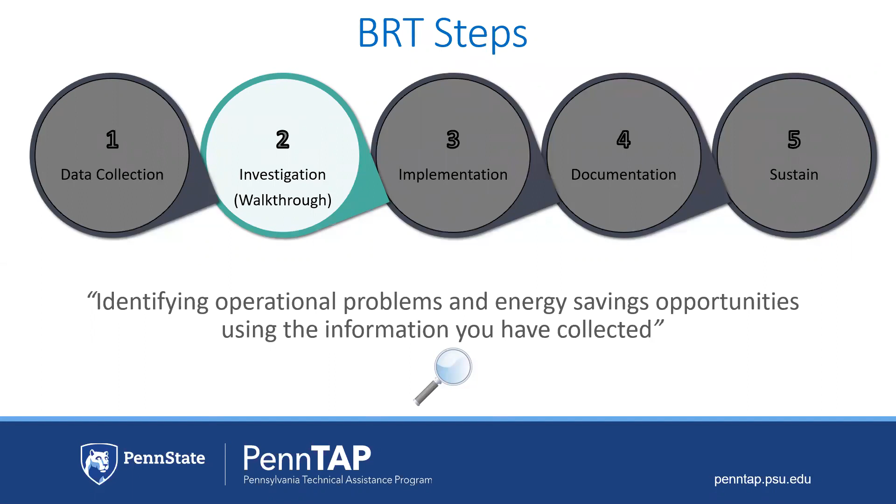Investigation or walkthrough is the second step. After you have the data collected, it's time to investigate. Look at all the building's conditions and operations. You want to investigate both during the heating season and the cooling season to see if everything is operating properly. You want to log all information and observations during the walkthrough. This will help you capture opportunities and ultimately calculate potential energy wastes and savings.

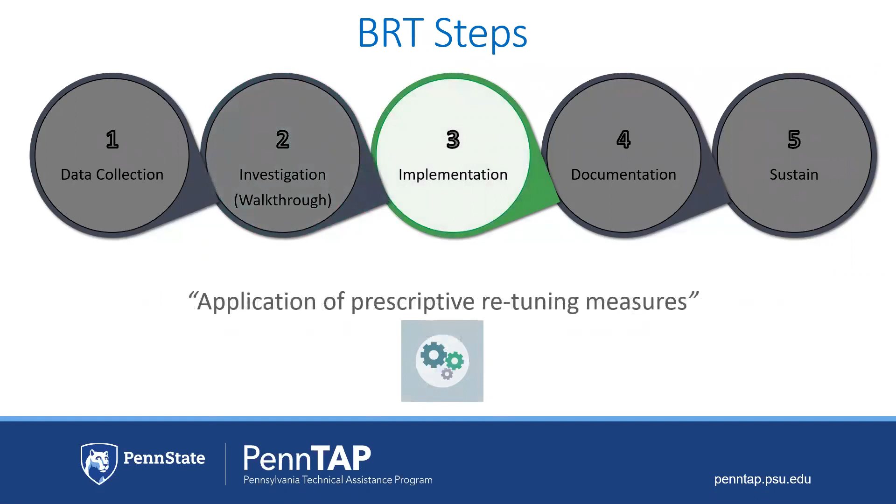The implementation step, this is self-defining. This is the application of your prescriptive retuning measures. Documentation, step 4. This is the reporting of your retuning findings and your impacts. Maybe you found some opportunities throughout your facility. Maybe it's for LED lighting, or you saw that you should insulate some of your hot water piping. You know what you need to do for implementation to fix the identified problems. Now you need to document and calculate what the savings would be. This will help you rank your projects so you can select which ones to pursue going forward.

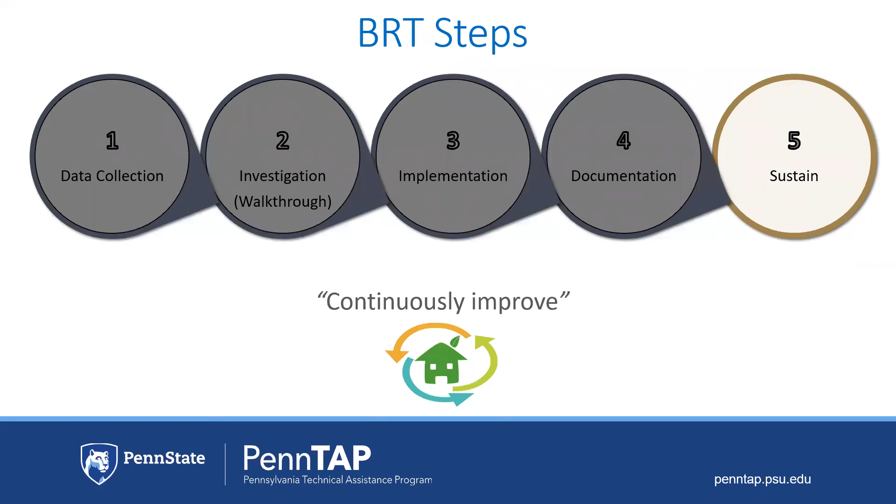After you have initiated the first steps of BRT and you have implemented some projects, your future goals will include continuous improvement and sustainability measures. We will discuss benchmarking and energy policies during the workshop. But reflecting back on the principles of BRT mentioned earlier, the sustain step is necessary to keep up with the positive impacts you've initiated so that you do not lose your momentum.

While completing your investigation, which is step 2 of BRT, we recommend you take a few low-cost tools with you to help uncover any issues. The Kill A Watt is an electricity usage monitor. Connect appliances to the Kill A Watt and it will assess how efficient they are. The LCD display will count the consumption by kilowatt hour. From there, you can calculate your electrical expenses associated with that tool or equipment by day, week, month, or the entire year. You can check the quality of the power by monitoring the voltage, line frequency, and power factor.

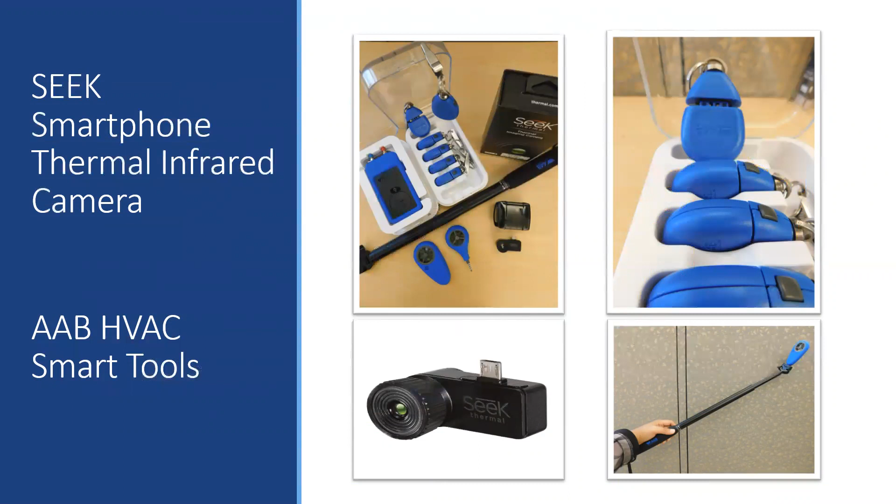A light meter is used to measure the number of foot candles in a designated area. This is helpful to understand if the area is overlit, underlit, or if daylighting is effective. Distance meters, or a measuring tape, can be useful to confirm the square footage of a space, and you can use that information to size equipment, such as if you are considering ductless HVAC systems, among other projects. Many smart tools are available nowadays and are useful in building retuning to measure temperature, humidity, airflow, and air pressure.

Find problems like air leaks, missing insulation, or even electrical overloads in power lines with the Seek Thermal Infrared Camera. This is a tiny, compact, portable camera, and this equipment can be used with either Android or iPhone smart devices.

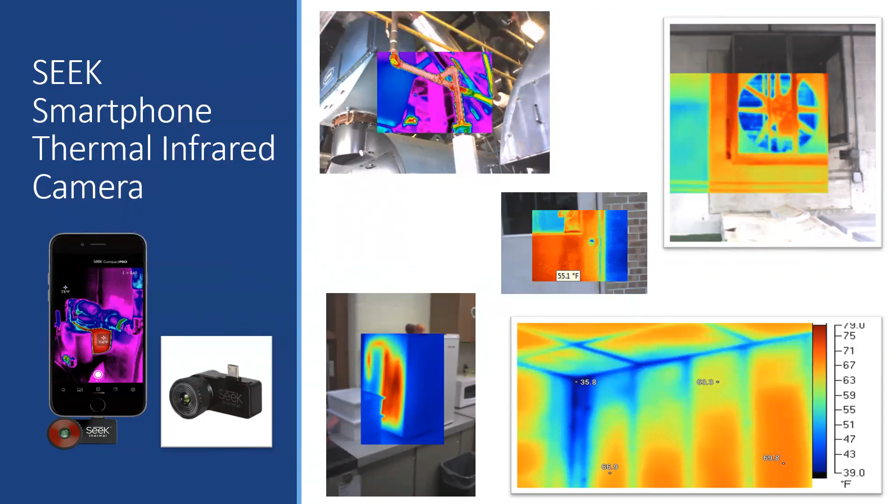Granted, in this case, you would need to investigate more to determine the root cause, but at least you have discovered a problem and now you can move forward to correct it. There are a lot of high-cost infrared cameras out there, such as these, which cost thousands of dollars. But the basic model of the Seek thermal camera only costs $250, making it a low-cost tool.

You can use these tools to help you identify if a room is actually too hot or too cold. Do you think you might have a leak in a damp area or spot? Maybe it's an old issue and it no longer applies. You can confirm with these tools if you have an active problem or a passive problem. These tools are no bigger than an egg. They are discreet and they are very simple to use.

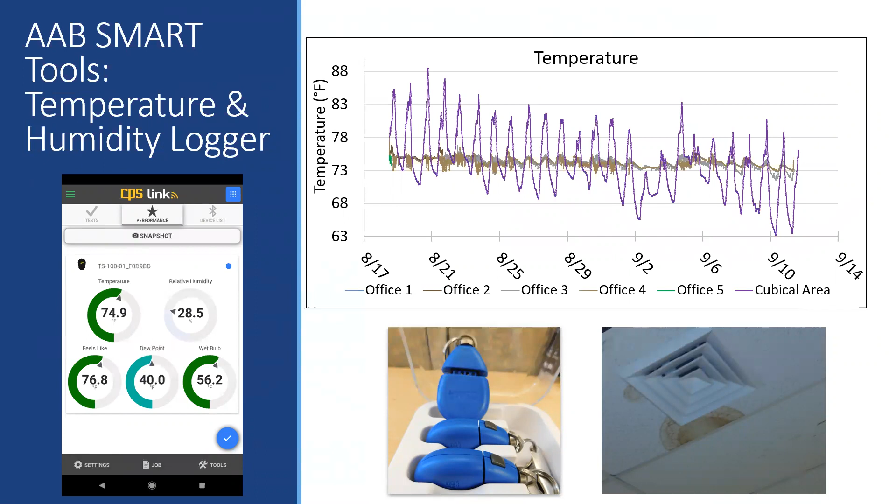There are a variety of AAB Smart HVAC tools that support building investigation. Another tool is the airflow meter. Here you can measure the airflow of your overhead vents, air blowing under an external door that might have broken weather stripping, or from wall units in the classrooms or in hallways. When was the last time your wall units were cleaned of debris? This tool can help you figure out if your equipment is showing signs of degrading.

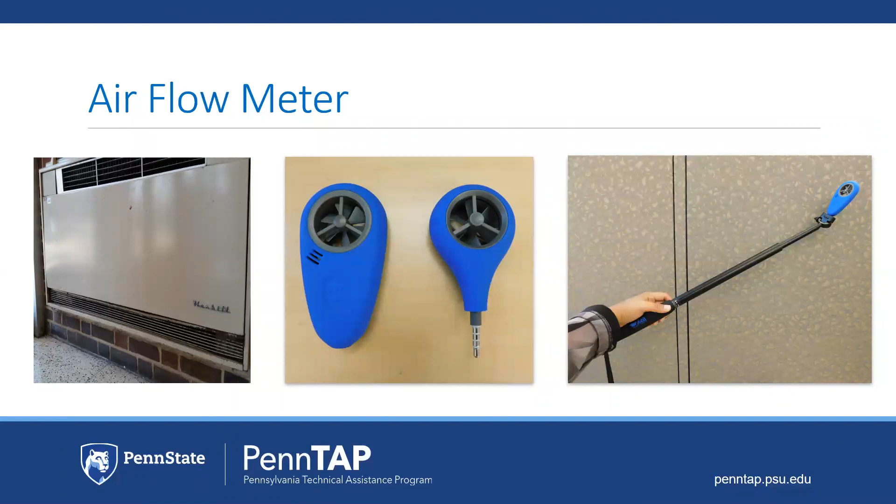Please note that we will have these tools and others at the workshop for review. To take advantage of the smart tools, you will need to download these apps to your smart device. Seek Thermal is the app for the infrared camera, and CPS Link is the app for the AAB HVAC smart tools. These apps can be found on the product's websites and are free to download. I recommend downloading the apps prior to the workshop so that you can take advantage of these tools at a closer look.

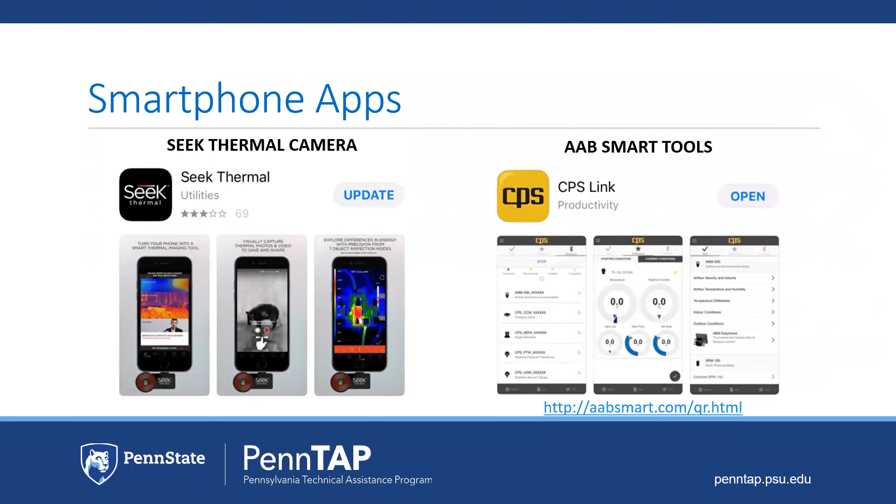Energy savings. The concept is easy to discuss, but can be tricky to calculate. Up next, I'm going to walk through a few examples on how to calculate energy and cost savings.

Lighting. A school building has a standard fluorescent lighting system comprised of 34-watt T8 lights with a standard ballast in a 4-lamp troffer. It is proposed to install 4 18-watt T8 LEDs in the existing fixture with no ballast.

Estimate the energy savings in dollars and the simple payback if the system operates for 4,000 hours per year and has 100 fixtures. The demand charge used in the calculations will be $10 per kilowatt, and the energy charge is 5 cents per kilowatt hour. Also, an installed LED fixture is $50. There's a lot of information in this scenario, but we're going to break it down with what facts we have, and we will go through the calculation over the next few slides.

We are looking to determine the energy savings in dollars and the simple payback, which is the time it takes for you to pay off your investment so you can start using those savings for a new project. So to move forward with this problem, we will need to determine the energy and demand savings.

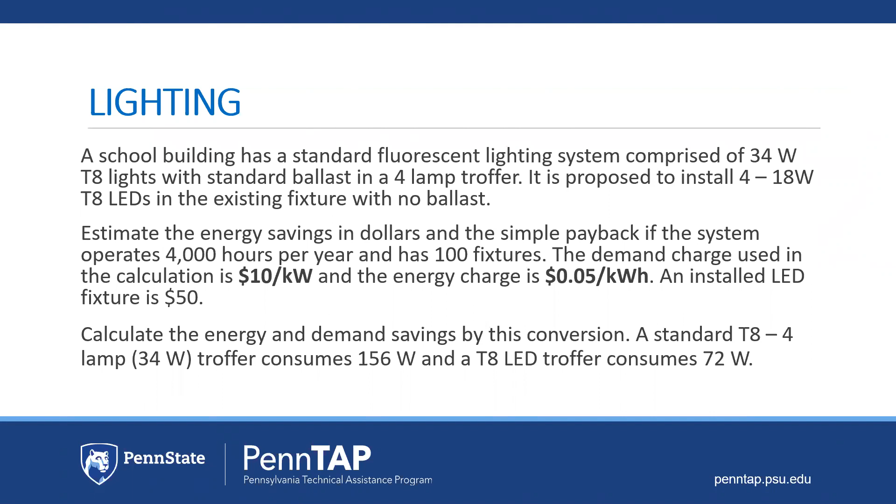So as suggested, we will calculate the demand savings and the distribution savings. We will take the difference between the existing consumption and the LED consumption to find the difference. Multiply that by 100 fixtures, and you will have, in this case, 8,400 watts of demand savings or 8.4 kilowatts of demand savings. Take the kilowatts you are saving and multiply this by the time in hours you are running your equipment. 4,000 hours per year gets us 33,600 kilowatt hours per year in energy savings.

To determine the cost savings associated with the demand and energy savings, we will need the values from the utility bills, in this case defined as $10 per kilowatt and 5 cents per kilowatt hour in our problem. To convert to LED, we are saving over $1,000 a year on our demand charges and over $1,500 a year on our distribution costs. Total savings comes to be at

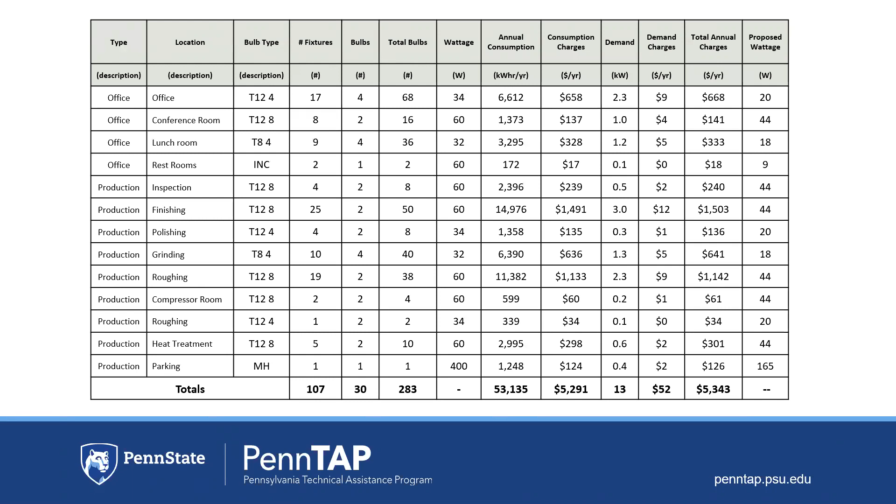Remember, you can determine the project payback just like we did in the example problem. Just take that example problem and scale it to as many or as few rooms you are looking to upgrade. This will give you the evidence that there are energy savings and cost-saving opportunities to consider, and allows you to present your case in a logical, well-thought-out order for the rest of the team to review.

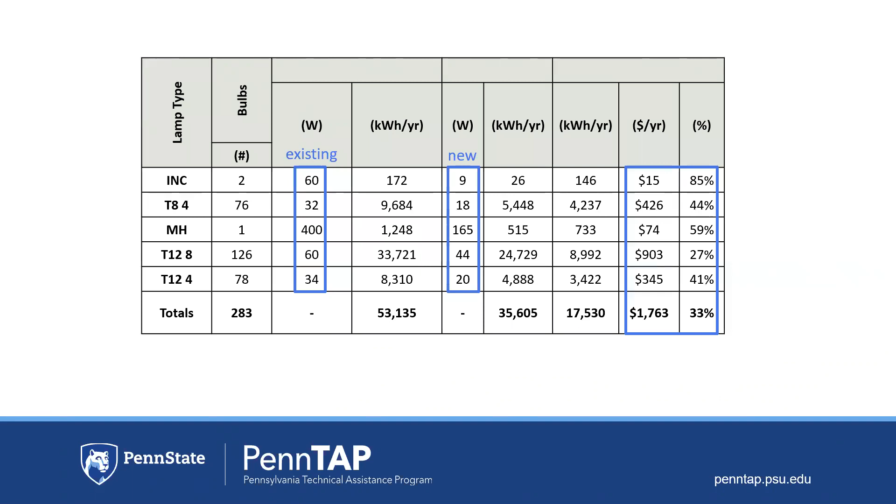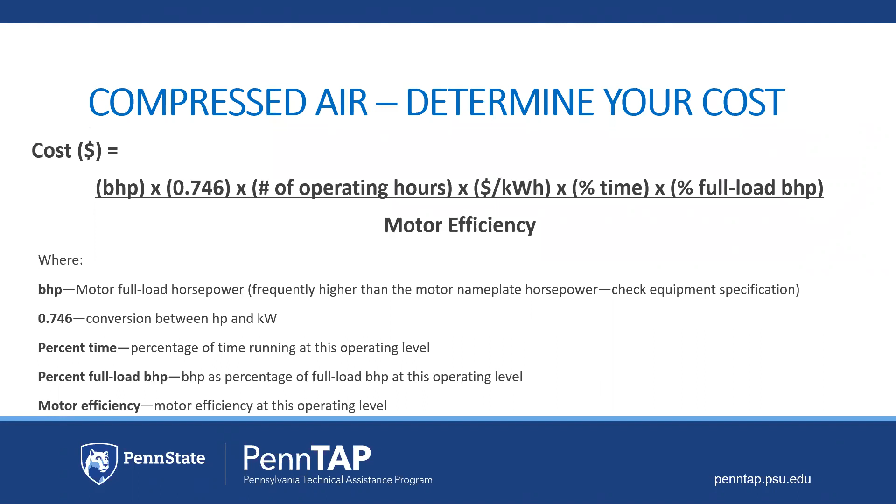Compressed air. A facility has a 200 horsepower compressor, which requires 215 bhp. This operates for 6,800 hours annually and is fully loaded 85% of the time, has motor efficiency of 95%, and is unloaded the rest of the time, 25% load, full load bhp, and motor efficiency of 90%. The aggregate electric rate is 5 cents per kilowatt hour. We are going to use this example provided and break it down.

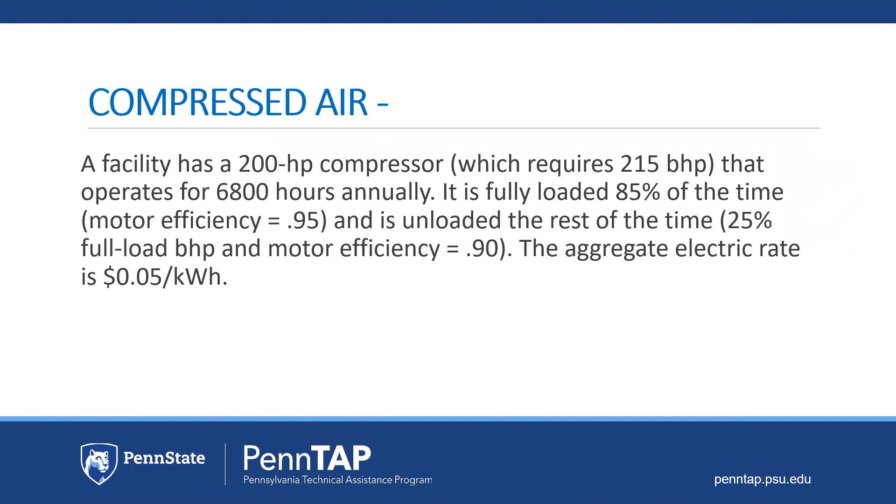Here we can calculate the fully loaded and unloaded costs of the compressor as it's currently used. When fully loaded, the motor efficiency is at 95% and the machine is loaded 85% of the time during the year. Unloaded, the motor efficiency is 90%. And remember, if the machine is loaded for 85% of the time, then it's unloaded for 15% of the time. This comes to a yearly cost of over $50,000.

Once you know your yearly costs, you can manipulate the equipment to lower cost and consumption. Maybe you can change the operation schedule. Also, check your system for leaks. Leaks will make the system work harder to maintain pressure, and ultimately, leaks are a complete waste of energy and money.

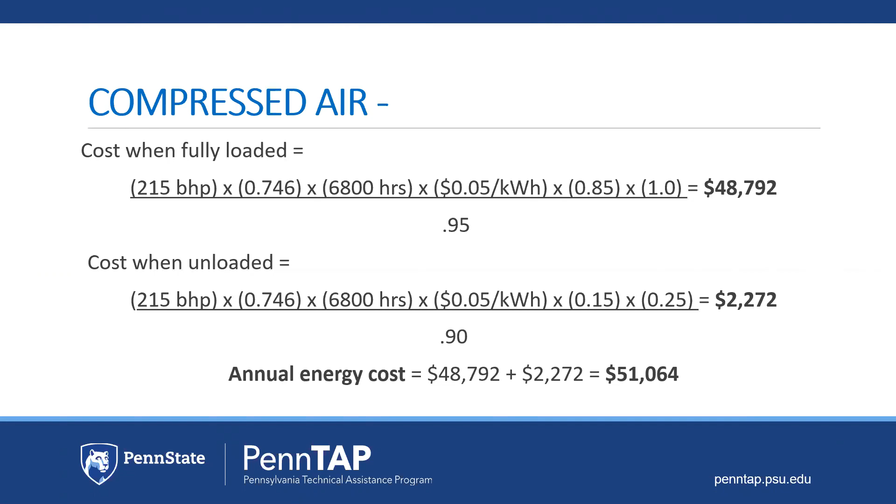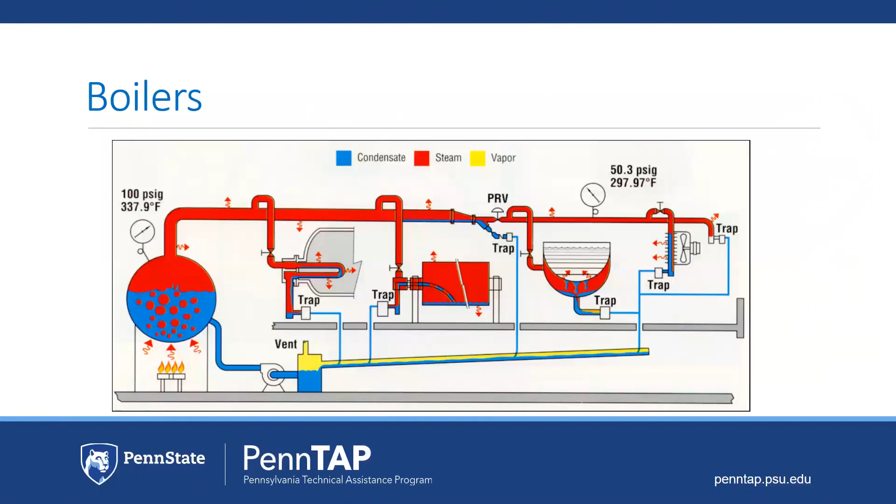Standard values for combustion efficiency of a boiler can be looked up based on the net stack temperature and the oxygen content. The net stack temperature is the difference between the temperature leaving the boiler in the exhaust and the temperature entering the boiler. The air entering the boiler is usually the air within the boiler room.

The energy savings from an increase in the combustion efficiency are calculated by taking the difference between the proposed efficiency and the current efficiency. The difference is multiplied by the fuel usage for that year and a unit conversion to switch from volume, such as MCF or CCF, to energy, which is in million British thermal units, MMBTU.

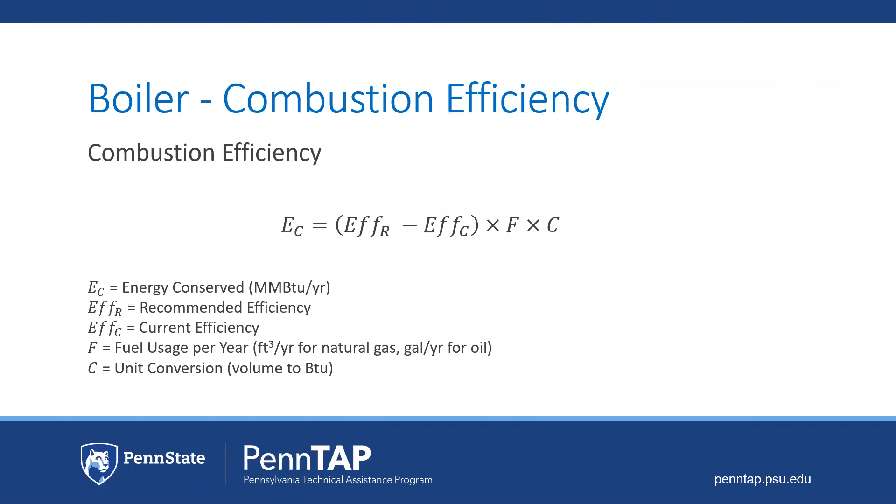Here is an example of using this equation. The difference between the recommended efficiency and the current efficiency is multiplied by the fuel usage. Consider your fuel type, if it is oil or natural gas or propane. In this case, we are using natural gas, 1,020 British thermal units per cubic foot. The value is then converted into million British thermal units. This gives you the energy delta of what you're currently using versus where you could be. So then you can determine your savings and decide if a tune-up is right for your equipment.

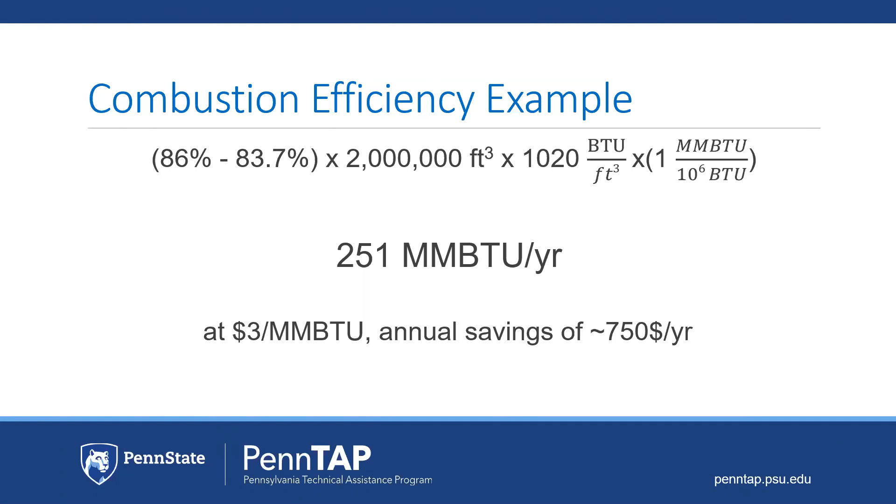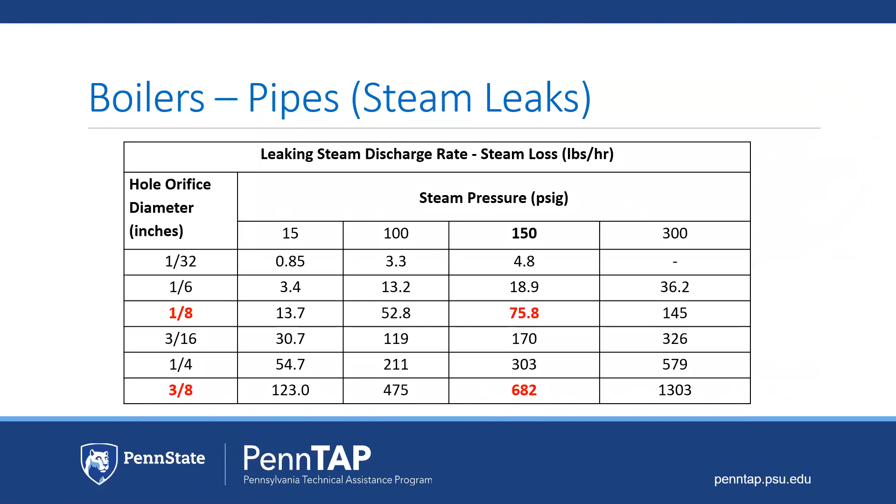Also, as applicable, find and fix steam leaks. Small steam leaks have big costs. With a 150 steam pressure and a 1/8 leak, the system has steam loss of 75.8 lbs/hr, whereas a leak that is 3/8 has steam loss of 682 lbs/hr. In costs, these leaks turn out to have high value, costing up to thousands of dollars each year. The point being, it's critical to be aware of any leaks and to maintain and properly implement energy measures.

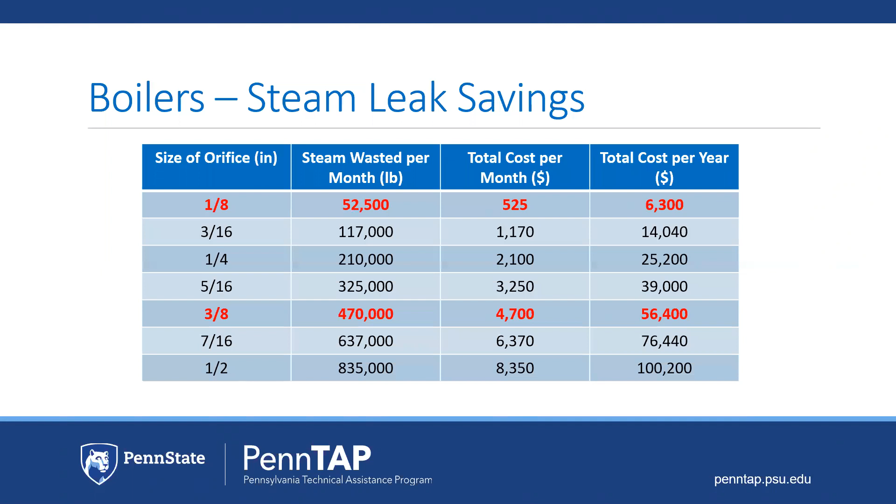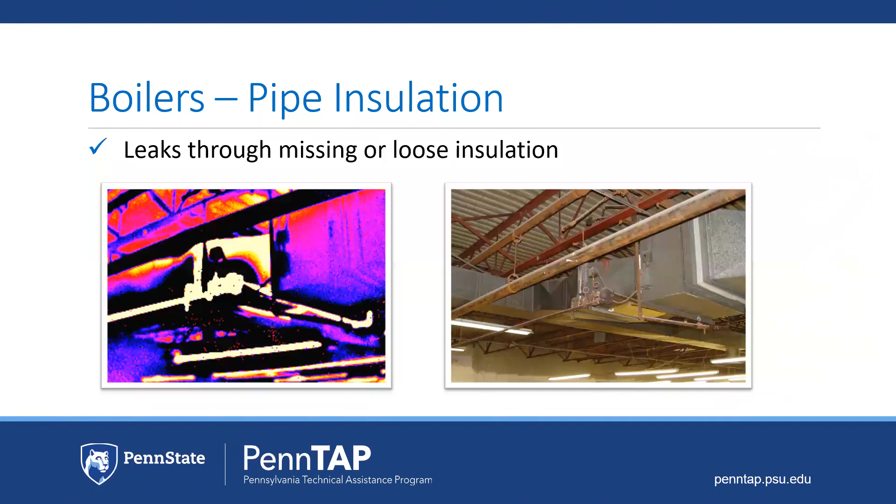So just like we talked about fixing the leaks for steam pipes and what the savings could be for your facility, now let's talk about insulating the boiler return and feed lines. In this example above, the facility has no insulation on the return or feed lines. The photos illustrate the heat loss from the pipes. Those photos from the slide before are from an actual client who insulated their return and feed lines, and these are their results. They ended up insulating over 1,000 linear feet of steam pipes and now end up saving over $39,000 per year by this energy saving measure.

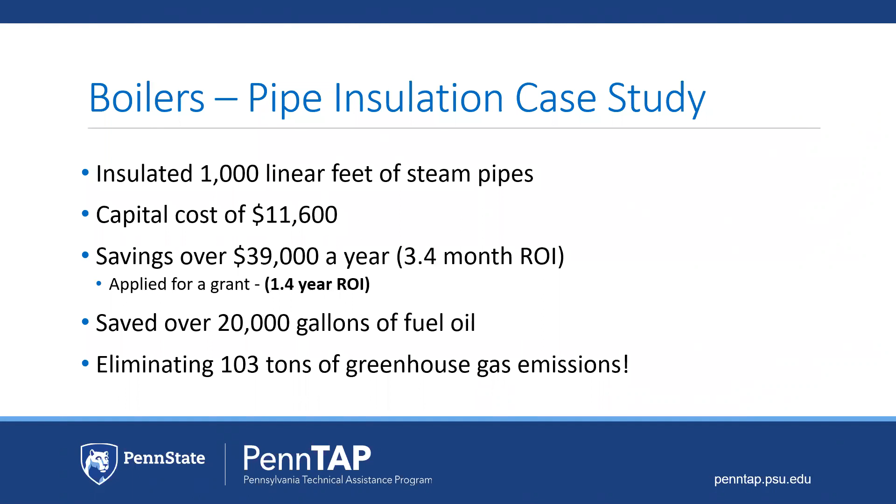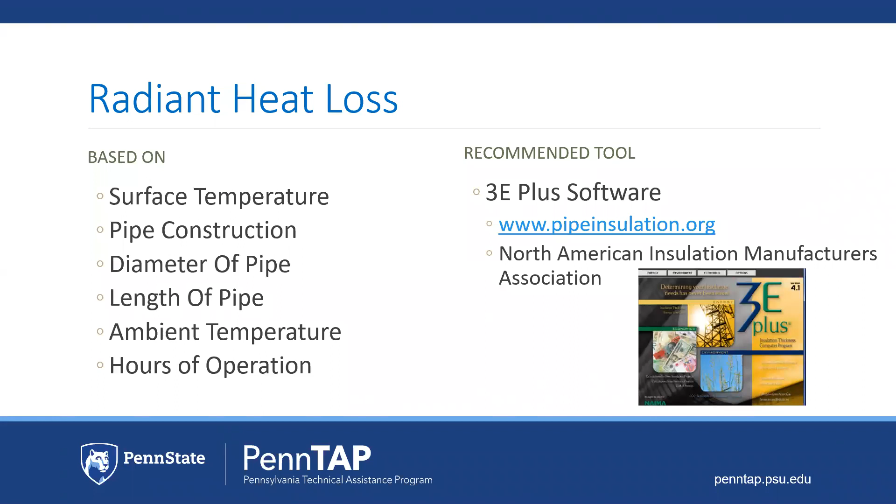The radiant heat loss from pipes depends on many characteristics of the piping, and there are softwares available to calculate the heat loss after the relevant data is entered. We recommend using these tools to help you with your energy saving measures. Once you have your data, you can manipulate it to see how you're doing and see if there's any seasonal changes that make sense. You can also see when you're hitting your peaks and see if there's a way to control those spikes. This can be done with your utility bills as well as any readings off of your equipment that you've been managing.

Please note that PennTAP will be providing notes and fact sheets during the workshop to help you through these different scenarios. If you have any questions about your equipment or system, please feel free to reach out to me and I can help you find a way to address that issue.

Success stories. After you have put forth all of your efforts in discovering the information about your building, investigated for improvement opportunities, and initiated next steps on energy-saving projects, you will want to sustain this hard work. This can be done in many ways. Consider an energy management system for your facility, or continue to benchmark using Portfolio Manager and the Asset Score tool. Continue forward with preventative maintenance programs, such as eMaint or SchoolDude. Upgrade your Energy Star-related devices and appliances.

And, when you can, tell your story about the savings from your current BRT projects. This encourages behavior changes with occupants of the building and inspires department heads to fund future projects. With that in mind, I'd like to share a few stories about previous BRT attendees.